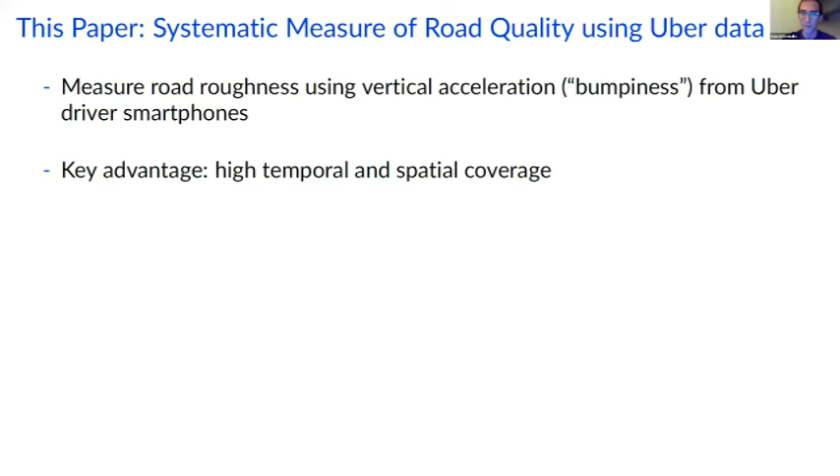We're going to move in this direction in this project using data from smartphones of Uber drivers that we use to measure vertical bumpiness of the ride of the trips that drivers are making. We're going to use this data as an input into creating a road segment roughness measure. And the key advantage we want to highlight for this type of data more generally is that it has the promise of very high spatial coverage as well as high temporal coverage.

So previewing a bit beyond what can be in our paper, we see the potential for systematic data collection of this type by fleets of vehicles, whether they belong to city governments or companies or other bodies, as well as autonomous vehicles. This data, in turn, having information on road quality at a more granular level, can be used to assess the efficiency of investments and how cities maintain and repair their roads, and more generally in the policymaking process. And number three, what I'll show you today, in the direction of measuring inequality in infrastructure at a very local level.

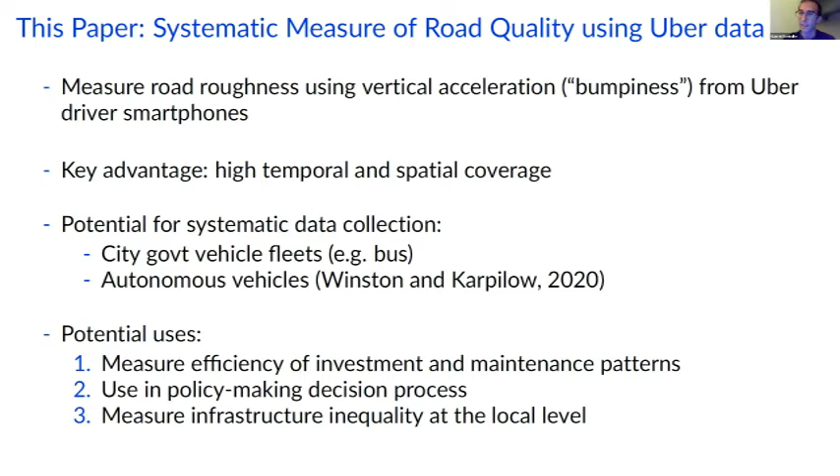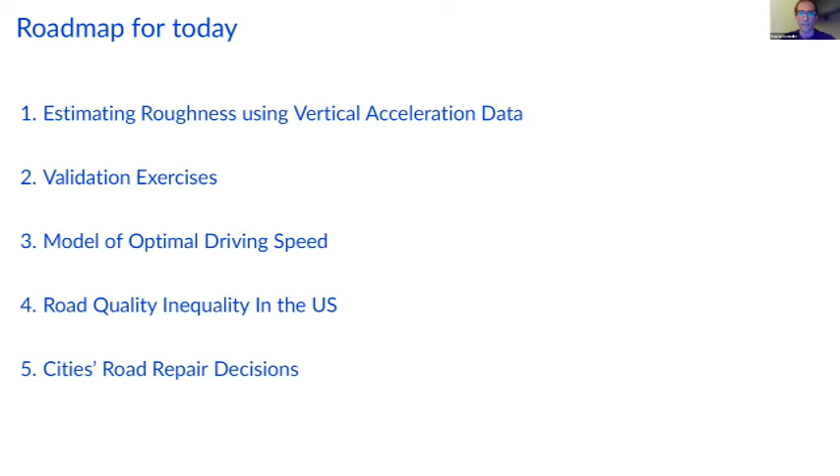So today I will describe the data we have and the methodology that we use to construct road roughness. I'll show you a validation exercise, and I'll tell you about the validation exercises that we've worked on a lot to convince ourselves that this has signal. I'll then briefly sketch a model that we use in order to summarize road roughness into a cost number, so to understand what are the costs of roughness through speed, and finally give some stylized facts about inequality in the US in terms of road quality and how cities repair their roads.

Let me begin with the data. Every smartphone nowadays essentially measures acceleration at a very high frequency, around 5 times per second, in the 3 directions relative to the smartphone. We are using data that Uber collects from the drivers' smartphones throughout all of the trips. Uber has an algorithm that realigns these axes and is able to give us the vertical acceleration dimension relative to the road rather than to the smartphone. This is going to be our primary input, this bumpiness in the vertical dimension of a portion of the trip for an Uber driver.

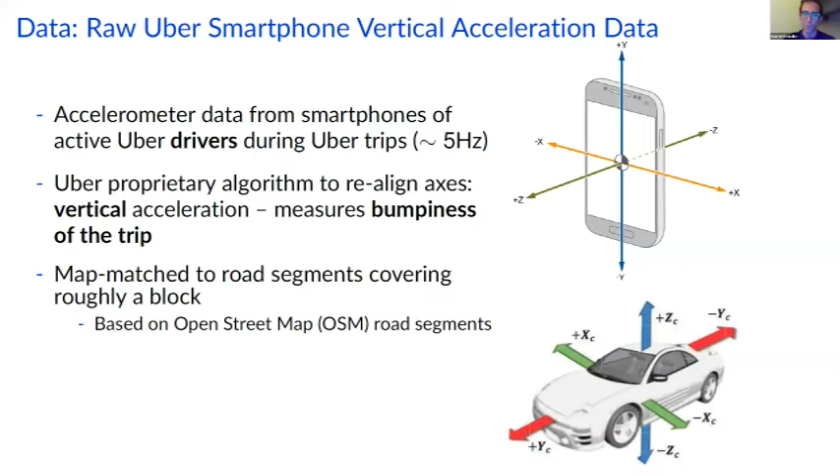We then take all of this data and map match it to road segments that you should roughly think of as covering one block, or one segment between 2 intersections in the road network. This is a map derived from OpenStreetMap at a particular point in time. We mainly use one cross-section for the entire US, all of Uber's trips in August 2021, as well as a panel of multiple months in Chicago in 2021 and some data in 2018.

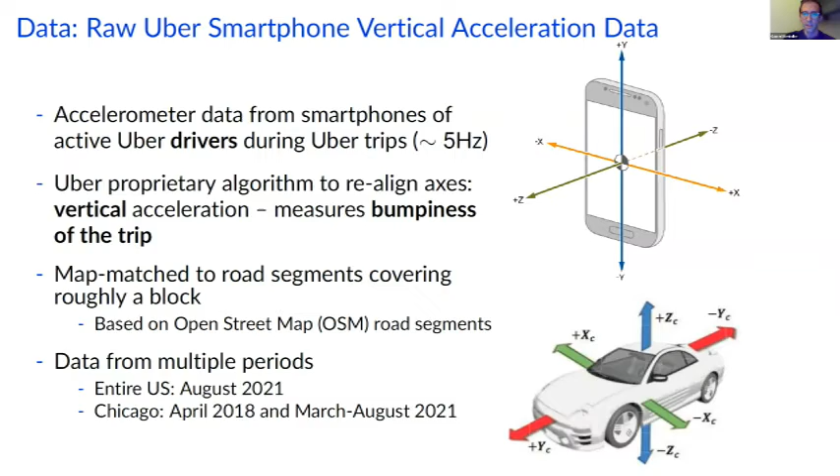Now, first, let me show you that there's signal in a very visual way. So here, as you can see below, we're looking at one trip from the O'Hare Airport to downtown Chicago. And you can see vertical acceleration in the top graph, and already some patterns start to emerge. So on the highway part, we see a smoother and less variable vertical acceleration and a lot of variation at key points during the trip.

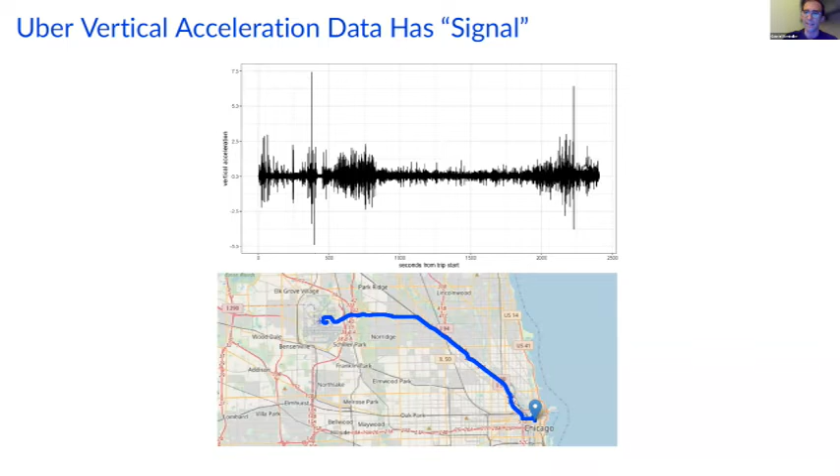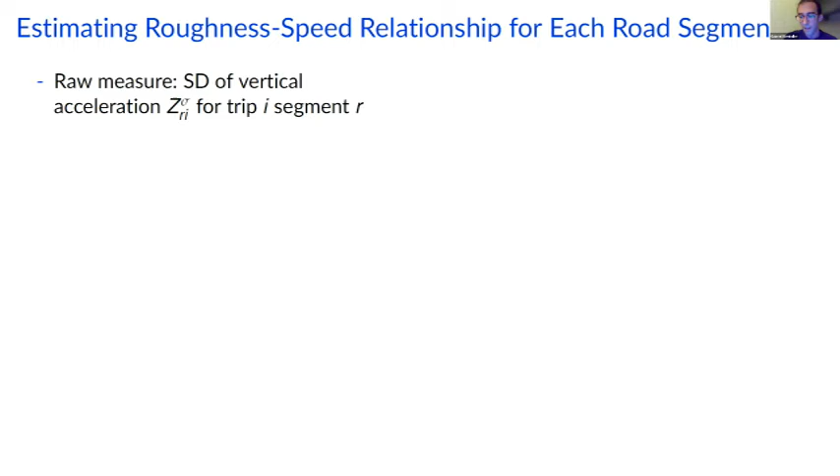Next, I'm going to switch to the methodology that we use to take all of this data and get a measure at the segment level of its roughness. We begin by taking the individual acceleration observations and computing the standard deviation for each segment R, for each trip I, taking all of the observations that that trip has on that segment and taking the standard deviation of vertical acceleration. Now, this is a raw measure, and the key challenge that we will have with directly interpreting it as road roughness is that drivers have an endogenous response to rough roads. They're going to drive slower. Okay, so if we use this as our measure, this will tend to make us underestimate differences in road roughness.

Fortunately, we have abundant data so that we're going to estimate the entire relationship between speed and this bumpiness measure, basically leveraging the fact that we observe Uber drivers going over the same segment with different speed levels. And this allows us to get this entire slope.

Technically, we'll estimate a regression where this raw measure is our outcome, and we're interested in both an intercept and the slope that are segment specific in how speed affects this raw measure of bumpiness. We also include some fixed effects for drivers, dates, and hour of the day. We do multiple robustness tests to make sure that we are adequately controlling for how drivers choose speed.

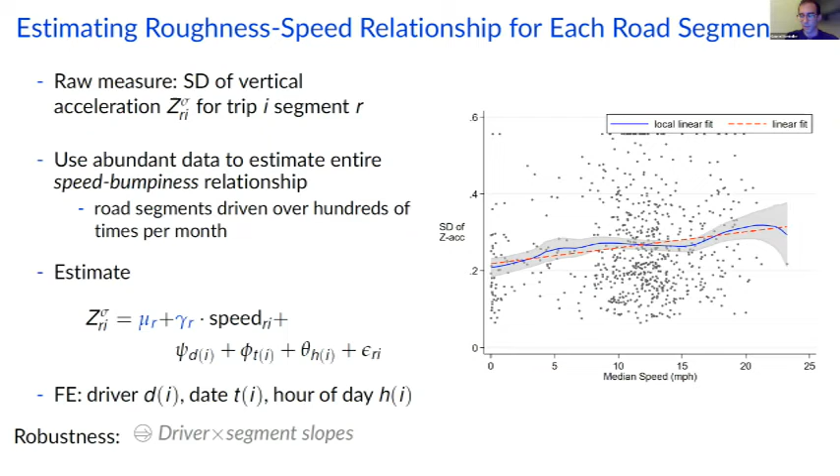And in the end, our measure of roughness is going to take this relationship and then plug in a fixed speed. So we're going to choose 20 miles per hour for local roads. This is the median speed that we observe in our data. And the thought experiment is, if we saw drivers going exactly at 20 miles per hour over this segment, what amount of bumpiness would they experience? And we do the same for arterials and highways and use different speed levels.

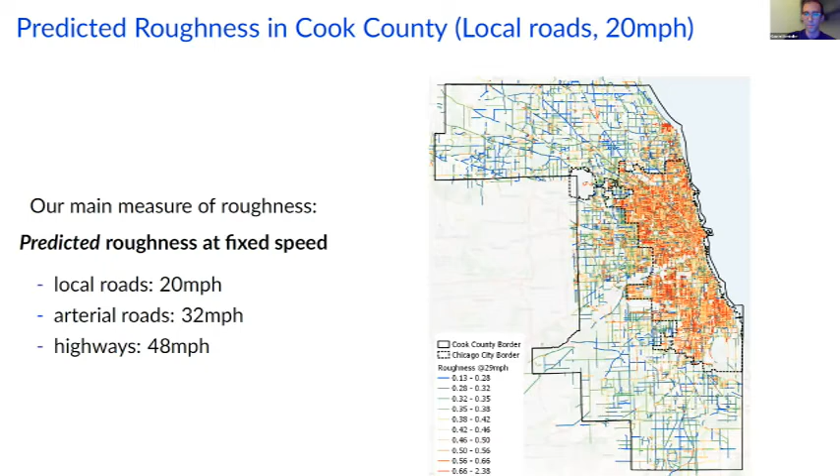Briefly, we do a lot of validation exercises. I'm going to show you one and briefly mention others. We use the International Roughness Index, a widely used and accepted measure of road roughness collected by state DOTs and published in the HPMS, which is available for highways and arterials mostly. And in Chicago, in Cook County, we compare this with our measure.

We look at national level DOT IRI versus Uber roughness, in New York City comparing pavement condition index with Uber roughness, looking at how roughness varies at railroads and so on. And across these exercises, we're encouraged by how we see Uber roughness moving.

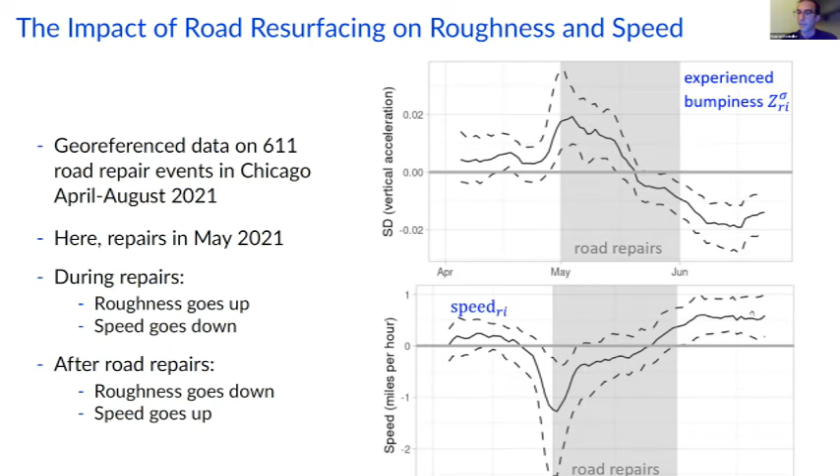Finally, I want to show you in Chicago as a last validation, we collected data on very precise road segments that were repaired in 2021. What I'm showing you here are two graphs with experienced bumpiness for roads that were repaired in May of 2021. You can see bumpiness going up initially, probably during construction, and then going down after repairs are over. And conversely, speeds going down during repairs and going up eventually relative to the baseline period on these segments.

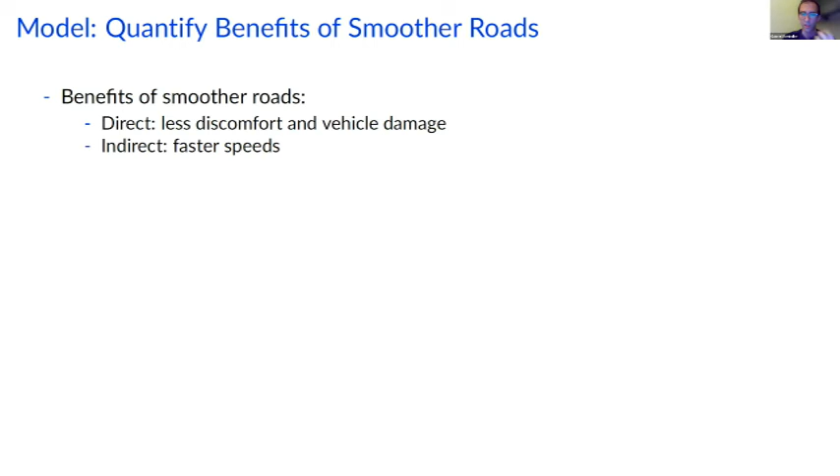I'm short on time, so let me discuss what we do. We have a model where we want to quantify two benefits of smoother roads. One is that there's less discomfort when driving, and an indirect benefit is that commuters drive faster, and the time that they save is valuable. Okay, so from a private perspective, we want to combine these benefits into one cost measure, and this model is going to allow us to do it.

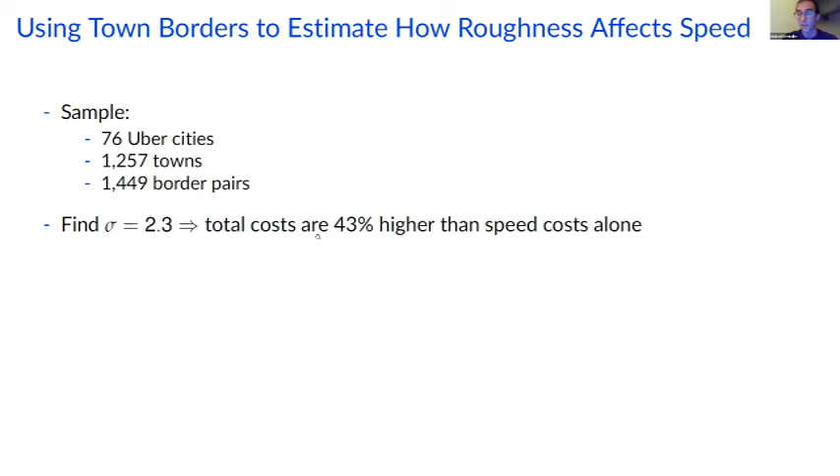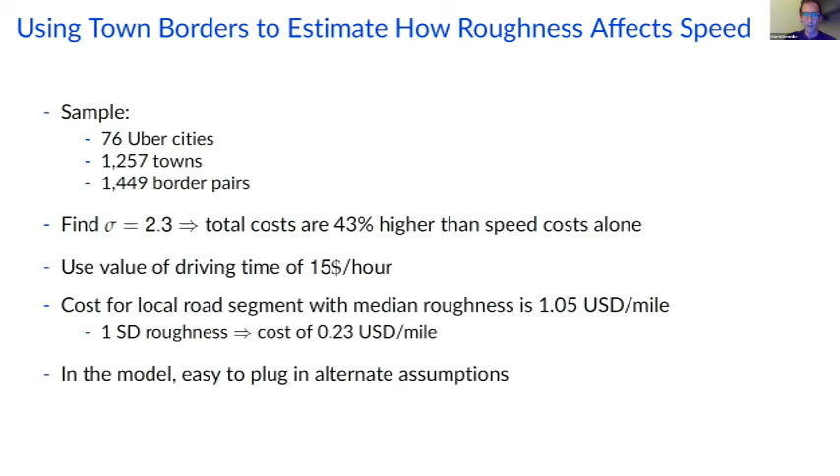Let me skip these details to saying that we can estimate the model using variation in roughness at the border of towns in the US, and find that total private costs are almost 50% higher than the speed costs alone that we observe as people drive faster on smoother roads. This gives us that a road that's one standard deviation rougher than the median will cost drivers 23 cents per mile more than the median one. And the model is designed to make it easy to use alternate assumptions here.